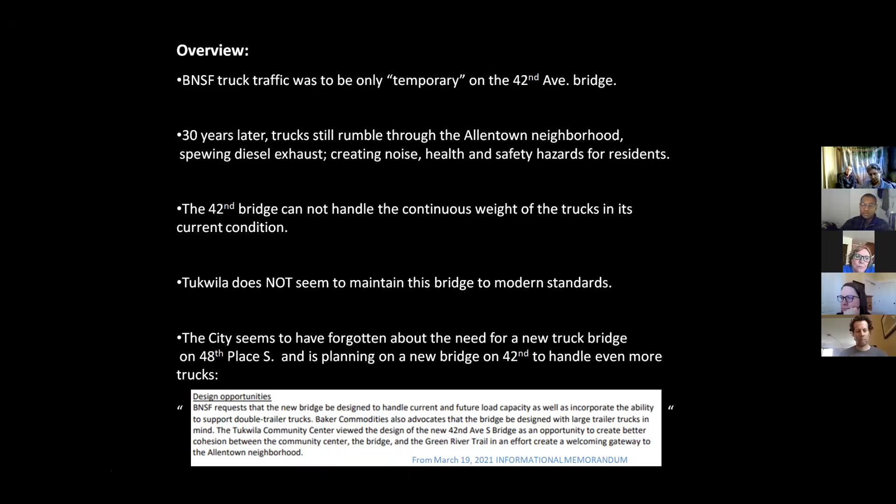And creating havoc, because the bridge is not being maintained, at least as far as I can tell. We would also like to see a bridge on 48th Place. There was a community meeting with the city on that, and that was the preferred route for the trucks. I noticed in the most recent informational memorandum put out by Hari and Group, that wasn't even brought up. And in fact, the new bridge that's going to be built on 42nd is going to handle more trucks, bigger trucks.

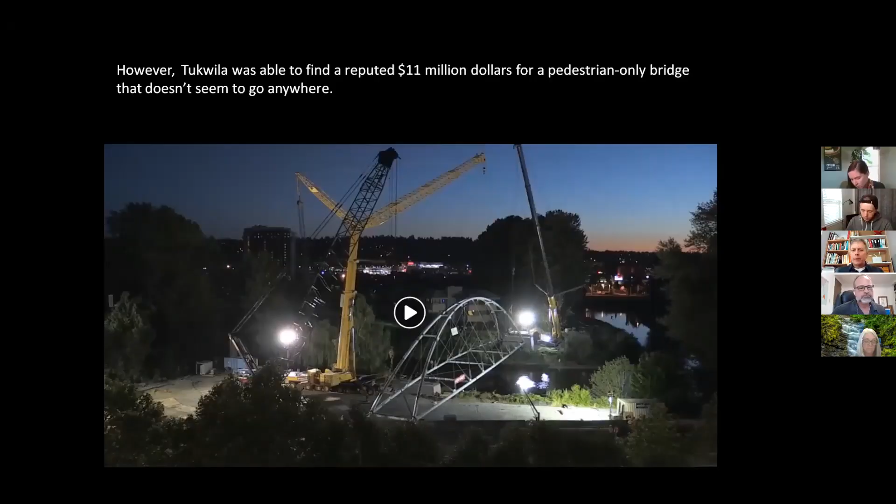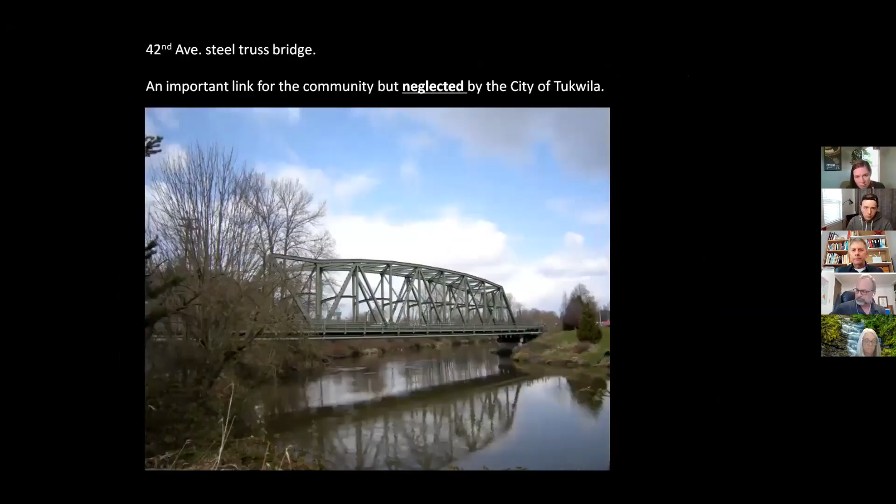So the bridge has long been neglected by Tukwila. But for some reason, Tukwila was able to find $11 million for a pedestrian bridge, opened in 2018. Nice bridge. No one seems to be using it, though. So doing a little research on bridges in Washington State and King County, the owner of the bridge...

This one is Tukwila, is supposed to send a biannual report to the Federal Highway Administration, and they're also supposed to do maintenance on the bridge, such as pressure washing, painting, and inspections, and it doesn't seem like that has been being done.

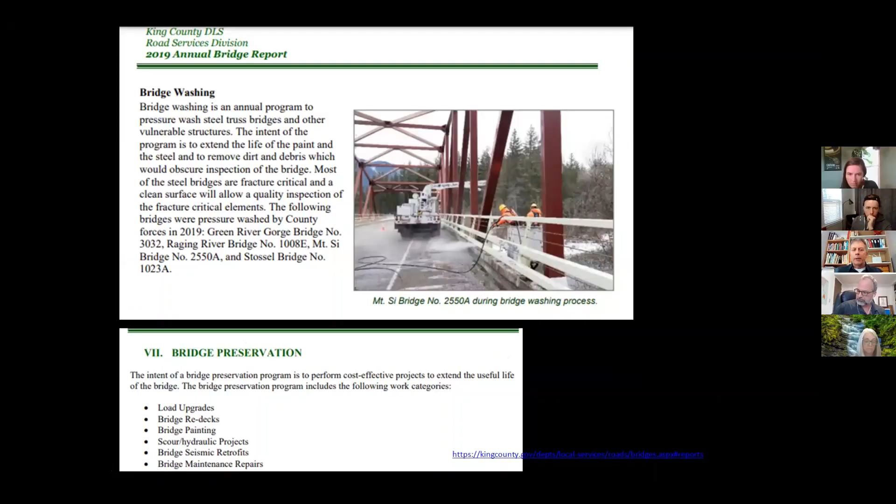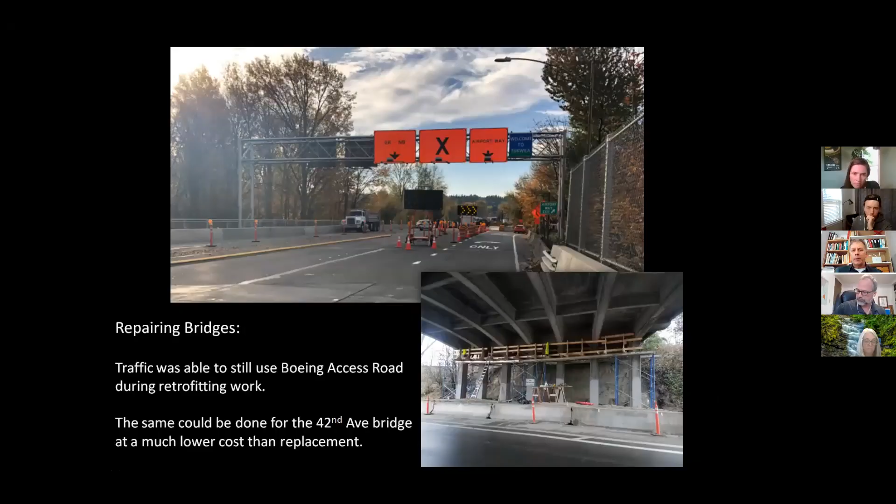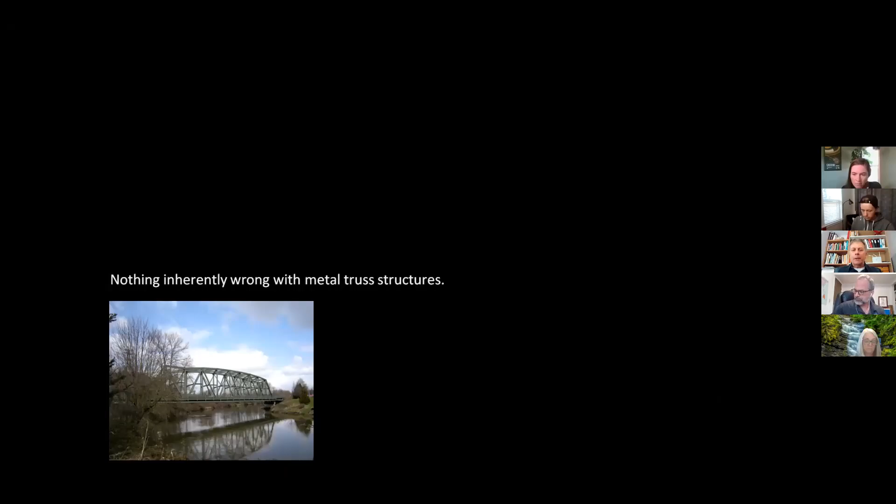So the bridge there on 42nd, a lot of people like it. I like it. It's a beautiful bridge, just needs a little help. There's nothing inherently wrong with it. It could use some reinforcing and bring it up to modern standards. But the bridge itself, there's nothing inherently wrong with the design. In fact, there's a lot of structures like it that are in continuous use, built a long time ago, but they're maintained.

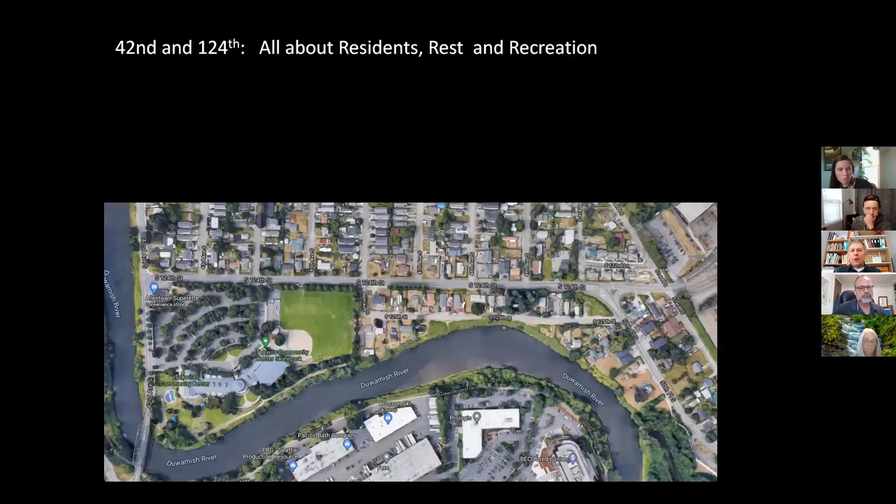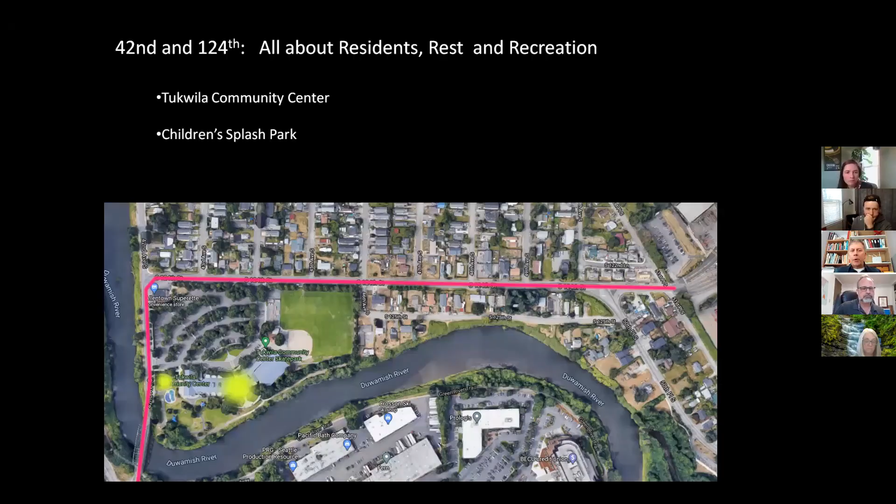So here's an overview of the lower Allentown neighborhood, and this is the current truck route. You can see it goes by the community center, the children's splash park, the skate park and large play field, the Allentown Superette, which helps the neighborhood. And that is just a crazy intersection right there, and over 45 homes which front the truck route.

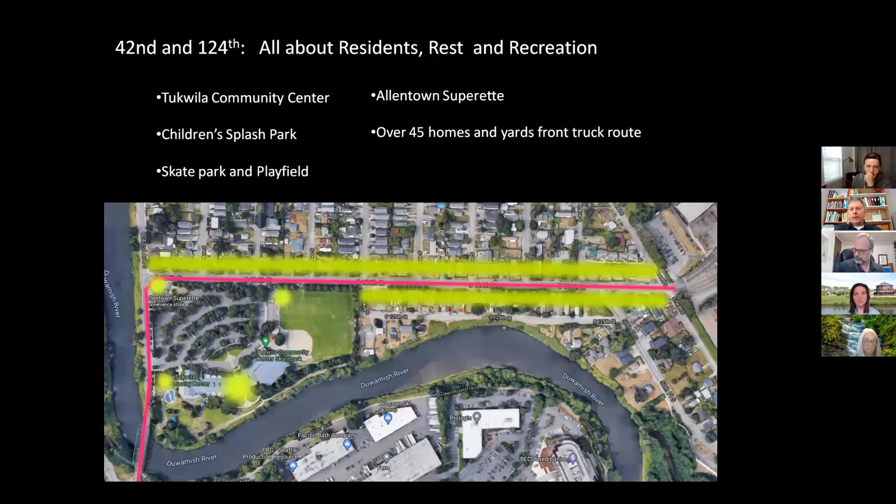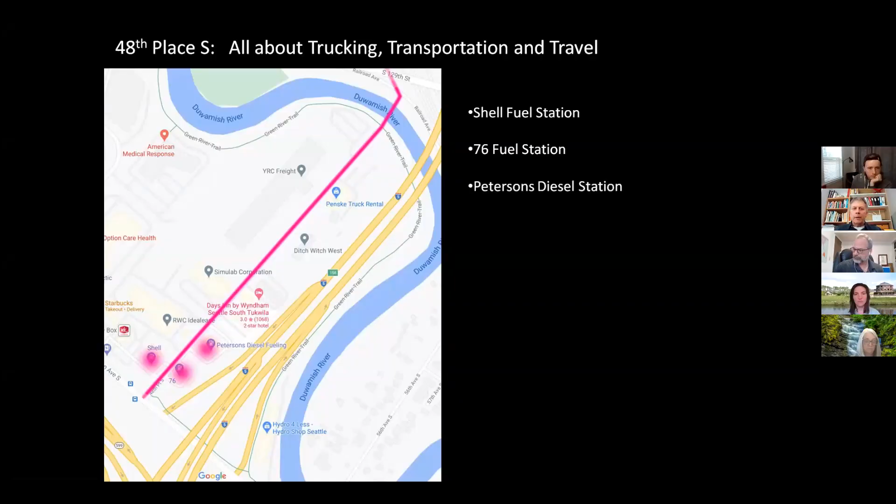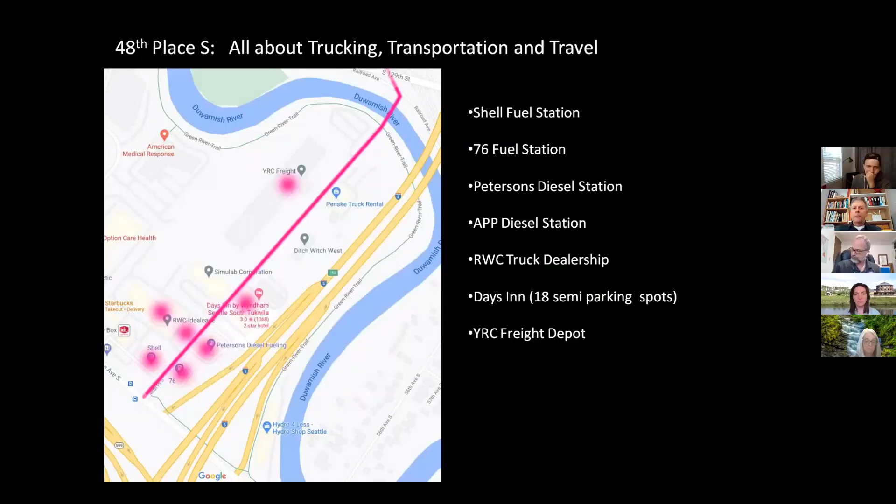48th Place, on the other hand, there's the truck route there. It's all geared towards transportation and trucks. There's the Shell fuel station, 76 station, Peterson's diesel station, plenty of room for trucks going in and out of there. There's the APP diesel station, the truck dealership, which is the International Truck Dealership and Leasing. Days Inn, which has 18 semi-parking spots, you can count them right there if you want. There's the Yellow Freight Depot and the Penske Truck Rental.

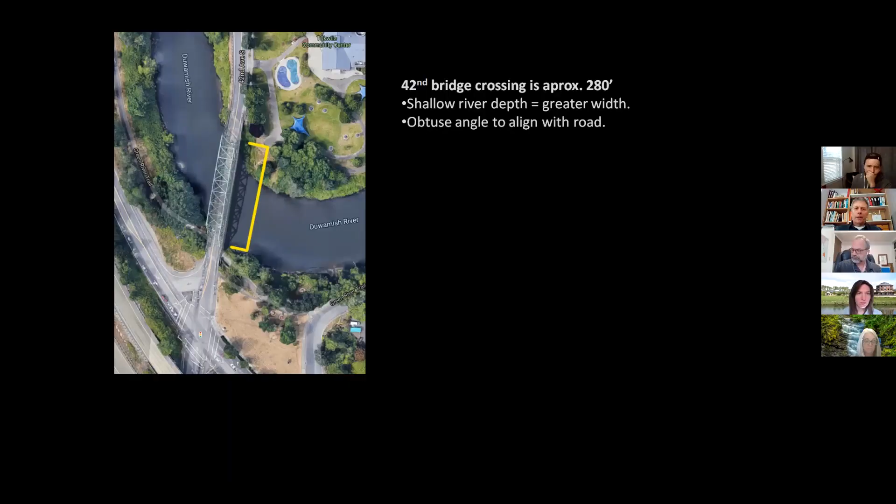So interestingly, I measured this on Google Maps, it's all approximate. The current bridge is about 280 feet. It's pretty long because it's at a kind of a strange angle to line up with the roadway, and also the river at that point is pretty shallow, so it's a lot wider. At 48th Place, the river is a lot narrower, by about 100 feet, so I assume the bridge there could be a lot shorter too.

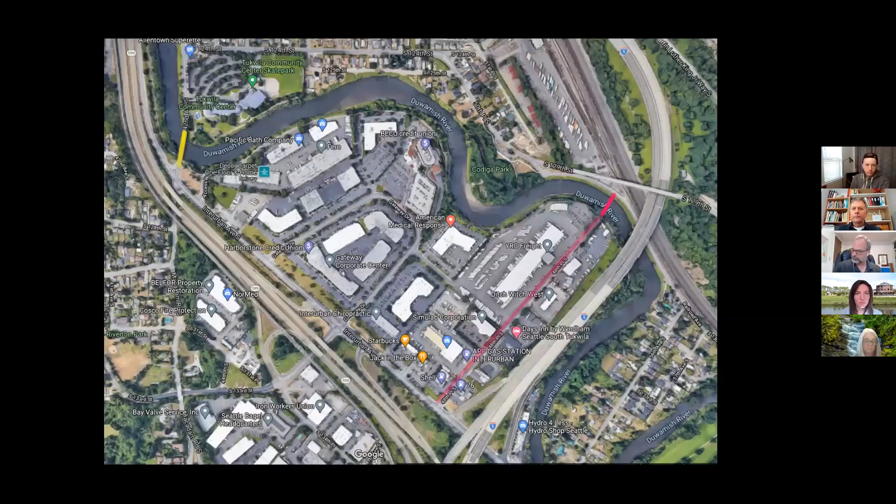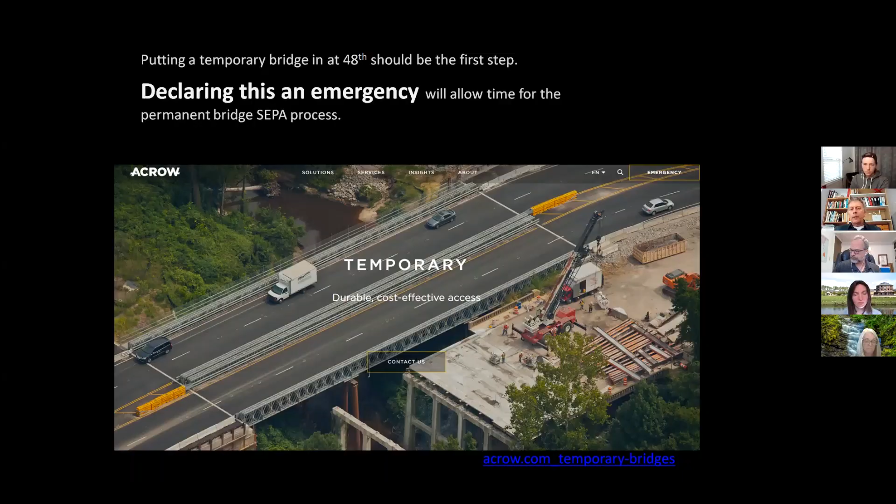We also think that declaring this an emergency could get this done immediately, putting in a temporary bridge and then going through the SEPA process for a more permanent bridge.

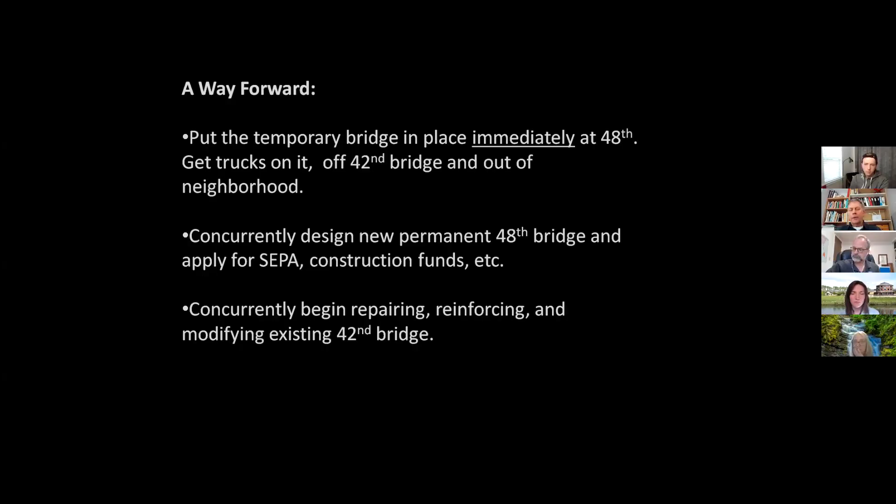So this is what we think the way forward should be. Again, putting in a temporary bridge immediately, getting the trucks on it and off the 42nd Avenue Bridge to prevent further deterioration. And then at the same time, going through the SEPA process, designing the more permanent 48th Place Bridge, and securing funds, and then also doing something with the 42nd Bridge, either replacing it or repairing it. Preferably repairing it and reinforcing it. That's all I have.